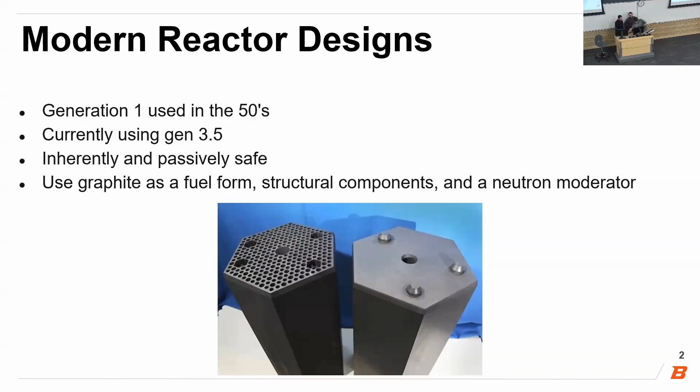Let's talk about more of this passively safe and inherently safe stuff. In an accident scenario, we lose cooling capabilities or something like that, and we have to get a lot of heat out of the core, whether from latent reactions still happening or all the heat that was in the core when it got shut down. Megawatts of heat need to come out, and the only way for that to happen is through thermal radiation between graphite components and the pressure vessel wall. Things that can inhibit this heat dissipation relate to a property called emissivity, which can be hindered by surface contamination and surface structure changes as this accident is happening.

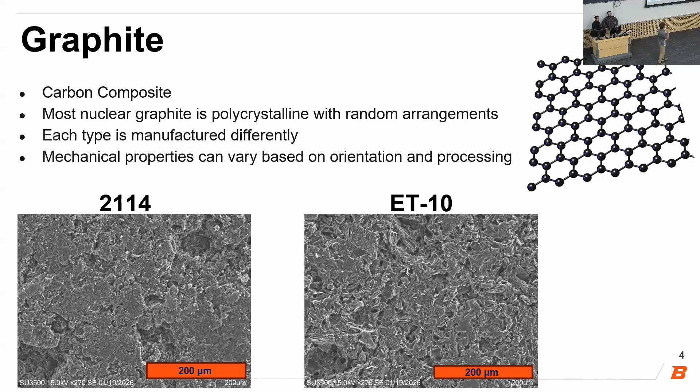Let's talk about graphite. Graphite is a carbon composite. It is polycrystalline and has a lot of different crystal arrangements. It is also very dependent on processing. Graphite suppliers don't like to tell us exactly how each grade is processed, so we just get to do research on it. A lot of the mechanical properties depend on what orientation you're looking at them, along with background processing. Seen here are two different graphite grades we looked at under an SEM image. There's a pretty big difference in the microstructure we observed, and that's just based on processing.

So what are we looking at in our research project? We're looking at emissivity. Emissivity can range from a value of 0 to 1, 0 meaning it reflects and does not absorb very much electromagnetic radiation, and 1 meaning it is a perfect absorber.

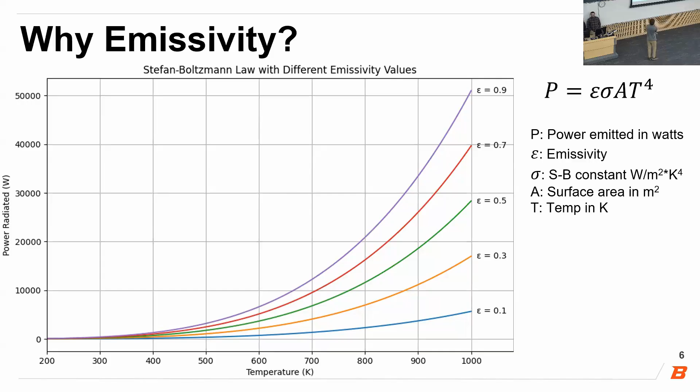Why do we care about this? Emissivity is used in the Stefan-Boltzmann law. The power that an object can emit is directly proportional to the emissivity, the Stefan-Boltzmann constant, the area that the object has, and the temperature. This chart helps you visualize the differences in emissivity at a given temperature. We can see at about 1,000 Kelvin, the difference between 0.9 emissivity and 0.7 - an object can radiate about 10,000 watts less.

So how do we measure this emissivity? We use a pyrometer, which takes infrared radiation from a surface, and using a known temperature from a thermocouple, we can use the Stefan-Boltzmann law to backtrack for emissivity.

Why are we doing this? Well, there's not very much published data on the emissivity of graphite above 500 degrees C, and modern reactor designs are having operation temperatures above 500.

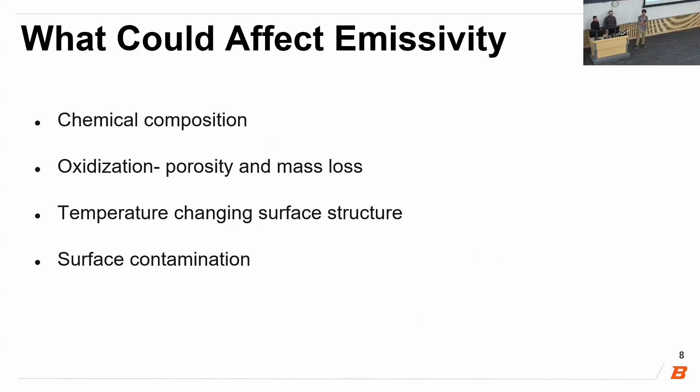So what can affect this emissivity value? The chemical composition of the surface, along with the oxidation level of the graphite causing porosity and surface changes, along with temperature and surface contamination. I'll hand it over to Dominic to explain how we did this.

So to measure the emissivity of graphite, our team developed this technical approach. It builds off previous work at Boise State and also improves the throughput and data confidence of data generated through our GEM system. So this is our basic experimental design.

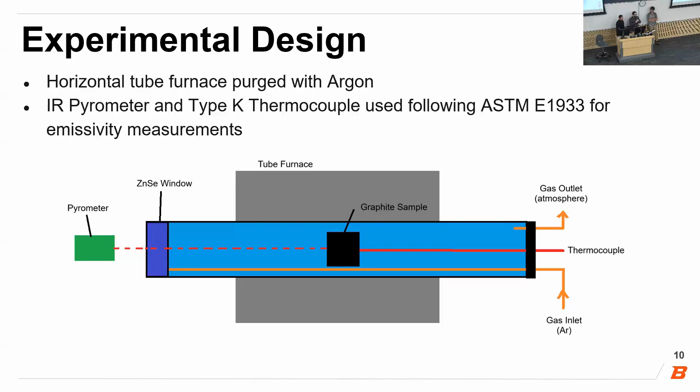On the right, you can see a flange with a gas inlet, a thermocouple, and gas outlet. In the center is where our graphite sample sits with the thermocouple inserted into it. On the left, you can see a zinc selenide window and pyrometer - zinc selenide, also a high IR transparency material. So the pyrometer and thermocouple work together to measure emissivity using ASTM E1933.

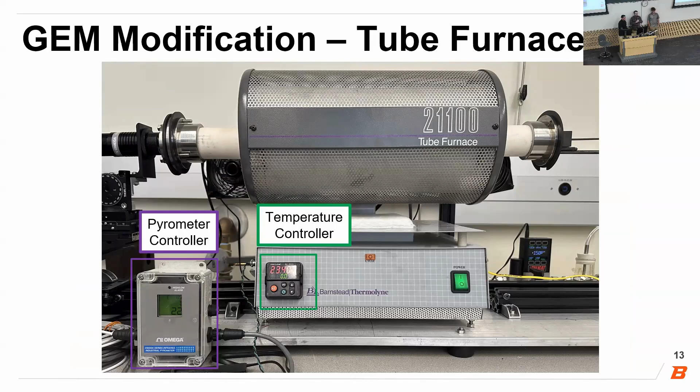We also made changes to the gas manifold and exhaust bubbler. To modify the tube furnace, we added a different temperature controller with dual TC input and RS-485 communication, as well as adding RS-232 communication to our pyrometer.

So the pyrometer is here, and you can see we added alignment stages to ensure precise and stable alignment throughout testing. You can also see an alignment laser to visually spot check where on the sample we are measuring infrared temperature.

So this is our LabVIEW software. It was added because each sample takes about 8 hours to run within the furnace, and we need 48 different runs.

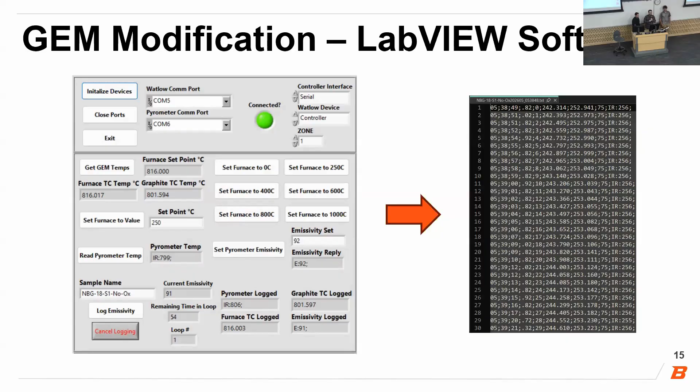So with this software, we were able to control the furnace remotely and then export that data to a text file pictured on the right.

So after modifying the furnace, we had to do a series of calibrations and qualifications. To verify the accuracy of the furnace, we did a calibration with our black body calibrator on our IR sensor, and using a reference TC, we verified our graphite TC. To verify precision, we also did a couple of tests: temperature stability of the graphite sample at each temperature set point, and repeatability testing using the same sample.

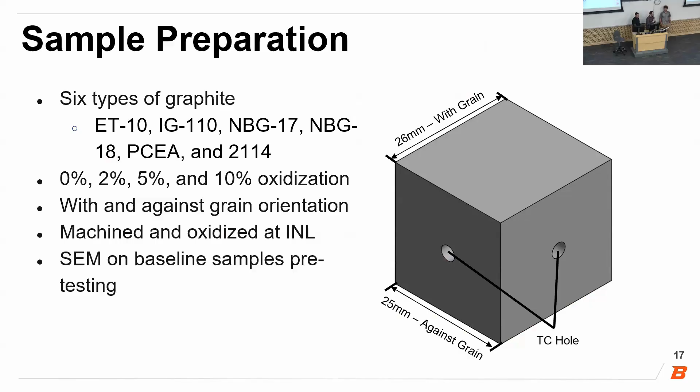We were testing 6 types of graphite, 0 to 10% oxidation, with and against grain orientation. All samples were prepared at the INL, and SEM images were taken on 0% oxidation samples. Each sample was run 250 to 1,000 degrees Celsius, with measurements following ASTM E1933. Some characterization was also done on select samples after we were done.

We tested 24 different samples with 2 different orientations, totaling 48 data sets. We've chosen ET10 against grain orientation to show.

At the start of the data collection, we ran one sample 3 times through, and we saw consistent data across all 3 runs, meaning we had very good repeatability that was within our uncertainty. All samples follow the same overall trend, with emissivity increasing steadily with temperature from 250 up to 1,000 degrees Celsius.

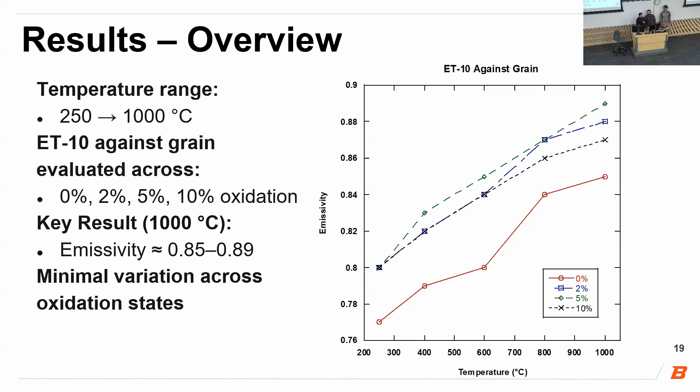This chart again shows the relationship between emissivity, temperature, and oxidation. Emissivity increases consistently with temperature for every sample. Across the full range, there is some variation between samples, but no clear pattern tying that variation to oxidation levels. At lower temperatures, most values are relatively close with one lower outlier, and as temperature increases the spread grows but follows the same overall trend. So overall, temperature seems to be driving the trend with little variance from oxidation.

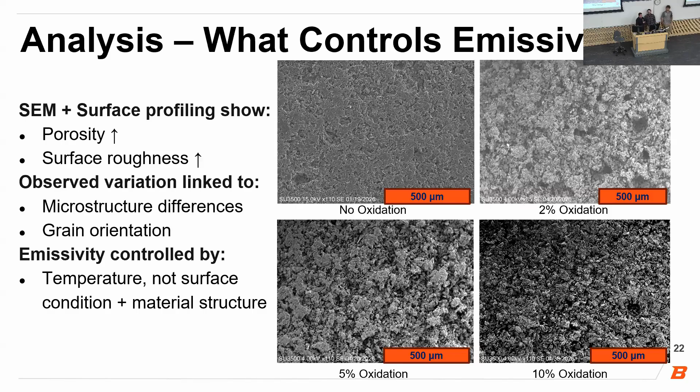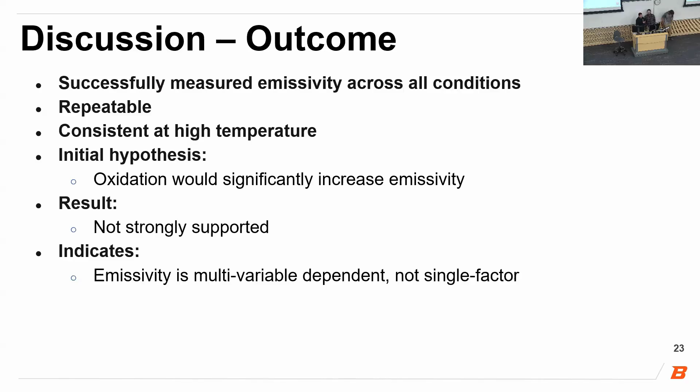Stepping back and evaluating the outcome of the project, we were able to successfully measure emissivity for several grades of graphite through all temperatures and oxidation conditions. The data set is repeatable and shows consistent behavior, especially at high temperatures. Going into the project, the expectation was that oxidation would significantly increase emissivity, but the data does not strongly support that trend. Instead, what we see is that emissivity varies, but does not show a strong or consistent correlation with oxidation. So the key takeaway here is that emissivity is not controlled by a single variable. Instead, it depends on a combination of factors, including surface temperature, surface conditions, and microstructure.

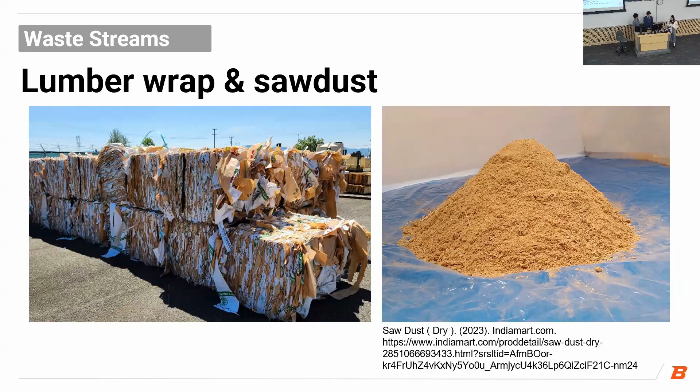Boise Cascade has continuously optimized their manufacturing processes to minimize waste. However, two irreducible low to no value waste streams remain. On the left, we can see one of the wood waste streams. This is the protective lumber wrap that is used in transport and is made of polypropylene. On the right, we have our other waste stream, sawdust, created during the manufacturing process.

The demand for wood increases annually, and in turn, the generation of wood waste also increases. Currently, 64 million metric tons of wood waste are produced annually. Additionally, approximately 28 million of this wood waste is treated, which means it contains a chemical wood preservant that contains chromium, copper, and arsenic, and poses hazards to human health and the environment. Boise Cascade, however, is already taking the important measures to ensure adequate sustainability measures when it comes to wood waste.

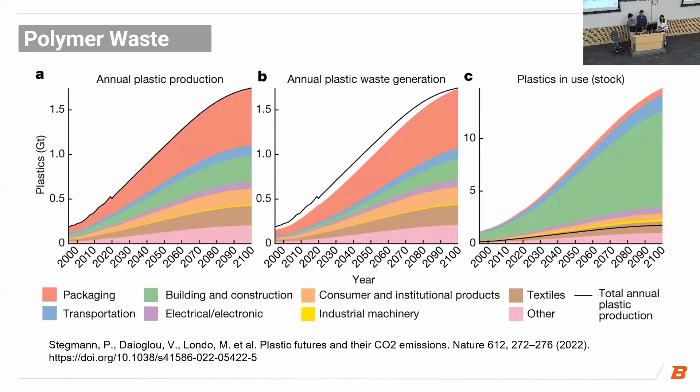This is why the upcycling framework becomes relevant. By transforming waste into a new material of higher value, Boise Cascade can turn their no to low value waste stream into a product that is competitive on the market while simultaneously increasing sustainability efforts. This ensures that the essential protective lumber wrap has an increased life cycle.

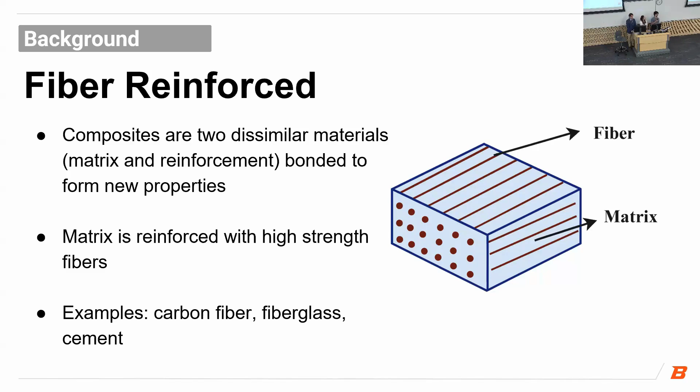Now for some background on composites. There are fiber reinforced composites, which composites in general are two dissimilar materials, the matrix and the reinforcement material, and they are bonded together in order to form new properties or to combine their properties. So the matrix is reinforced with these high strength fibers, and some common examples you see in real life are carbon fiber, fiberglass, and even cement.

And there are particle reinforced composites. These use the polymer matrix, and they're reinforced with uniformly distributed particles. Some of these particle types can include ceramics, sawdust, and glass beads. Some examples that we see in real life are ceramic composites and wood plastic composites, which is what we are tackling. So we have a polymer composite material, which has a polymer matrix and a wood particle reinforcement, which in our case is sawdust.

The industry standard actually uses HDPE or PVC, from companies like Trex or TimberTech, and we are actually using exclusively polypropylene.

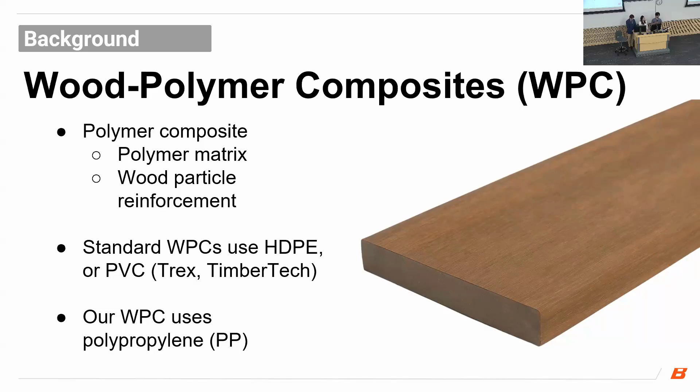So the reinforcement phase is supplied by Boise Cascade, and it's sawdust. It's supposed to boast a high stiffness and strength and improve the load bearing of the material. And it is a hydrophilic material, meaning it absorbs water easily.

As for our matrix phase, we have polypropylene. It's a ductile material, it provides the structure, and it's a hydrophobic material. It's also supplied by Boise Cascade, and this is one of their main waste streams.

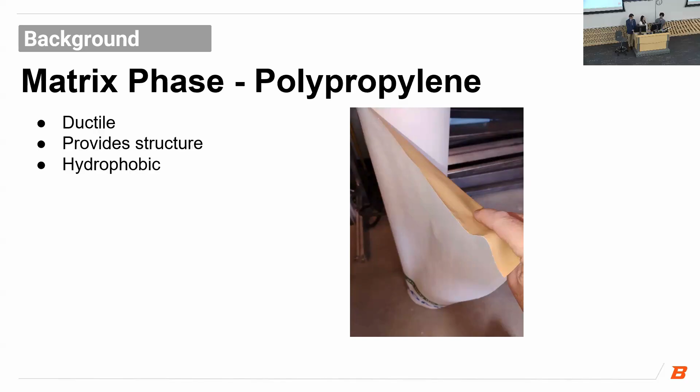So we are looking to combine their properties, but these properties do depend heavily on the composition, the interfacial bonding, as well as the quality of the processing.

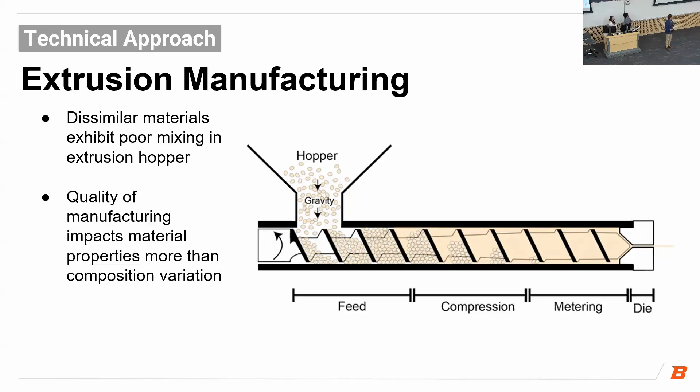Specifically, we accomplished this extrusion manufacturing by processing the 2 waste streams that Boise Cascade provided us, putting them in the hopper, which gravity fed the extrusion auger. They were then heated, compressed, and metered into a die, or in our case, 1x1 board molds.

The specific way in which we tackled this approach was by having 3 control groups and 5 variable samples. This allowed us to compare the wood plastic composites we manufactured to an industry standard, to an upcycled polymer that did not contain any reinforcement, and finally to an upcycled or a virgin polypropylene, so we could evaluate the impact that upcycling might have had.

The specific process we used is we processed both the lumber wrap and the sawdust before feeding them into an extruder. We then granulated the extrudate and potentially repeated that process as needed to ensure complete mixing. Once fully mixed, we dried the extrudate one final time before feeding it into a final extrusion, where the 1x1 boards were then sectioned and planed according to ASTM standards for a 4-point bend test.

All right, here are the results that were yielded from our testing. So here we have all our control groups, which is the Trex, the pristine, and the upcycled polypropylene, as well as our variable groups, which is the 5 through 40% wood weights.

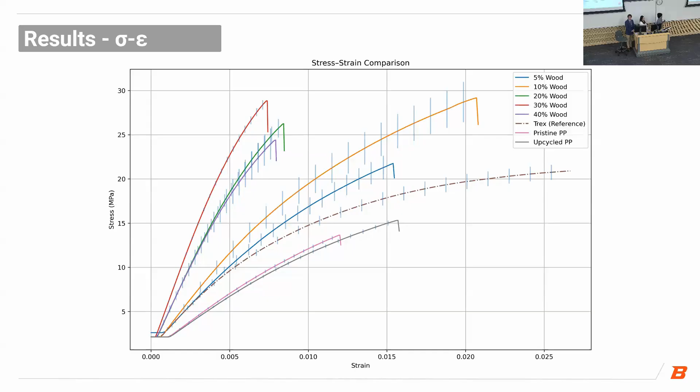Here we see there's a trend that occurs as we increase the wood content. There seems to be a stiffer curve, which must mean a higher modulus of elasticity, which is recorded over here.

But here we see that Trex exhibits about 1600 megapascals. Pristine and upcycled polypropylene have around the same modulus of elasticity as well, around 1200 megapascals. And once we introduce the reinforcement material, we see a sharp increase in the modulus of elasticity.

So we go to 1800 at 5%, 2200-ish at 10%, and 3800, a massive jump from 10% to 20%. At 30%, we peak at around 4700 megapascals. Then once we hit 40%, we dip back down. So 30% was peak for us.

There's a modulus of rupture with the same trend occurring. That dip occurs after the 30% into the 40%.

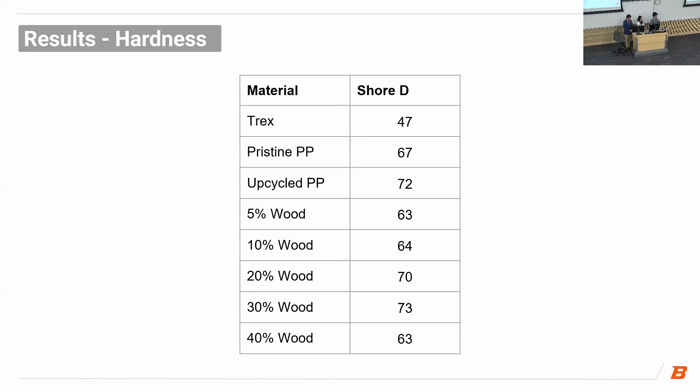And the hardness testing - not too much that's different across all of the samples we manufactured. There's a noticeable hardness difference between the industry standard Trex and our samples.

Unfortunately, it's not possible for us to discuss our results without also discussing some of the challenges we encountered. Predominantly, we found substantial voids throughout many of our samples, which impacted our results. The accuracy of the MOR and MOE is unknown, as it's not possible to quantify the exact impact these voids had on those specific numbers.

However, the hardness data was unimpacted, as the durometry testing was done on areas verified to be completely void-free. Throughout this process, we were able to improve the extrusion techniques we were utilizing and refine our processing to eliminate voids as the project progressed, but we were unable to do so completely.

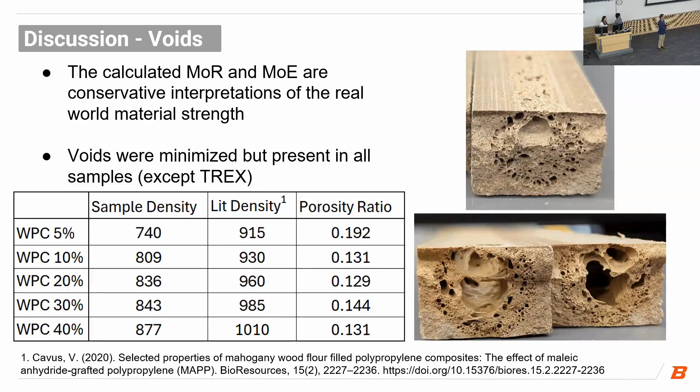This, however, doesn't impact the final conclusion of our project, which was determined using trends and comparisons between different samples rather than any individual numbers, which have that unknown error in their accuracy. And so to provide that conclusion, here is Joselyn.

We learned that despite the processing challenges we faced, trends show that a direct correlation between sawdust reinforcement, hardness, and stiffness exists. Future work should include improved manufacturing control, like an industrial drying and mixing process, and a vented extruder to try to minimize the void generation challenges.

Although future work is needed to create and optimize wood polymer composites, it can be said that for Boise Cascade, it is possible to create upcycled wood polymer composites from their two waste streams of lumber wrap and sawdust.

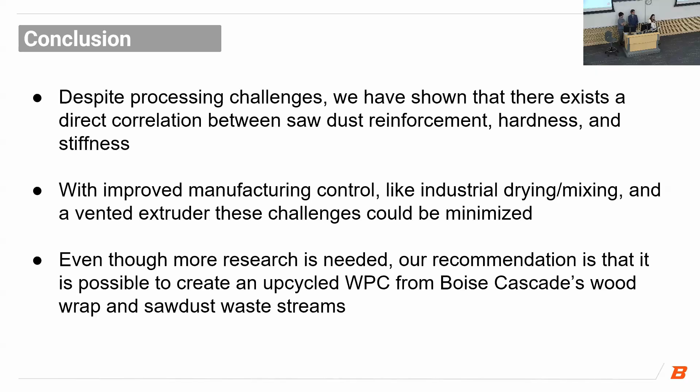Thanks, great work. How did your test results on Trex compare to published data on Trex?

The results we had on Trex compared to the published data seemed to be about approximately the same. The MOR we calculated was, I believe, within about 10% of the published value. But ultimately, the reason we wanted to repeat these experiments rather than use published data is because we wanted to compare exactly the same samples of exactly the same shape and geometry on our setup. So we feel the Trex testing we did is actually quite accurate in terms of its overall individual numbers, as that did not have any voids because we did not manufacture the Trex, obviously. So yeah, about within 10%.

So you have polypropylene, Trex as HDPE. That is correct, or PVC. It's HDPE. And virgin HDPE or PVC compared to virgin polypropylene.

Is that what you expect? Not quite. So we did the pristine, or virgin, polypropylene compared to upcycled polypropylene, because ultimately the goal here was to evaluate if Boise Cascade could make a viable composite material using the waste streams they had. And they have polypropylene, they don't really have HDPE. So even though a lot of the industry players currently use HDPE, we're really trying to investigate if we could use a different polymer and achieve similar results. We were mainly focused on the behavior of polypropylene to evaluate it as a candidate, rather than to evaluate if it was the best option for whatever use case scenario it may be used in.

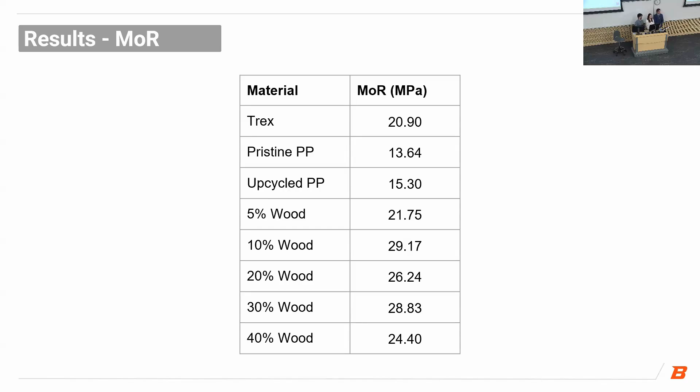Hello everybody, my name is David. These are my partners, Jacob and Joe. Our project is on charge trapping films and interfaces in 3D NAND devices.

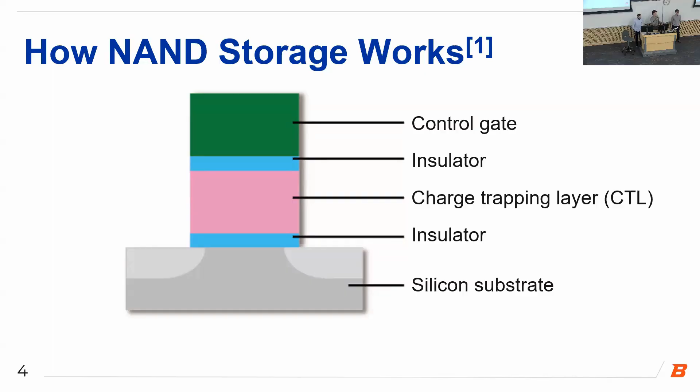To give you a quick idea of how NAND works: by applying a high voltage to the control gate, electrons can tunnel through the insulative layer into the charge trapping layer. When that voltage is removed, the charges are retained in that layer. By applying a low voltage to the control gate, electrons may or may not tunnel based on the threshold voltage, which is affected by the trapped charges. To remove the charges, you can apply a high voltage to the substrate to essentially pull them back out.

As these charge trapping layers get thinner, the operating voltage and power required decrease, which is a good thing, but the amount of available trap sites also decreases, making it harder to retain information for a long time. Any manufacturing step that alters the silicon nitride bond density and stoichiometry shifts both the trap depth and the spatial distribution of these charges. Because these processes are sequential, it's hard to know which process affects the films with what damage.

To quickly talk about the physics behind charge trapping: silicon dangling bonds are the primary source for both oxide and nitride films. In silicon dioxide interfaces, the traps are amphoteric and shallow, meaning only a little voltage is required to get charges in and out, making them not very reliable for trapping charges. In the nitride, the traps are in the bulk material—they're deep and spatially distributed throughout the film, requiring a lot more energy to get charge in and out. Any process that breaks these bonds changes how long and reliably charge is stored.

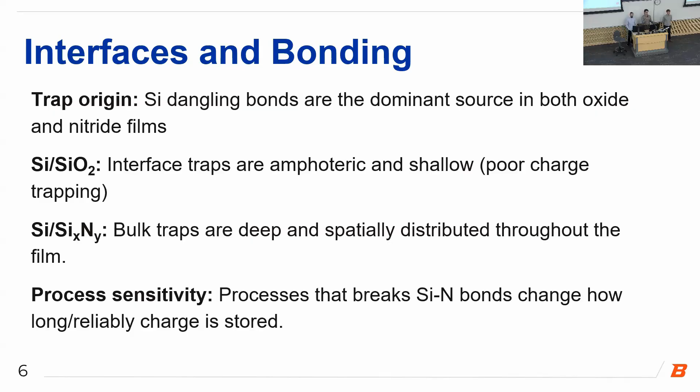We used several instruments to characterize our initial films. First, ellipsometry, which measures thickness based on phase and amplitude shifts of polarized reflected light. This can be fit to a model, giving angstrom level precision, and is also non-destructive. We used non-contact tapping mode AFM for surface topology, and KPFM to map surface potential, contact potential difference, and modified work function—this tells us if there's charge trapped in the film or not. Finally, we used XPS to distinguish the silicon 2p peak, indicating elemental silicon, silicon nitride, and silicon oxide bonding states, to track interfacial chemistry changes.

To treat our samples, we used two methods. We used electron irradiation with an SEM—this e-beam generates electron hole pairs, releasing hydrogen from silicon-hydrogen bonds and creating more silicon dangling bonds. We also used argon bombardment via an XPS instrument, where argon collisions preferentially sputter nitrogen, yielding a silicon-rich surface and inducing heavier physical damage. The goal of this project was to determine the effects of sample modification on charge trapping characteristics of both the silicon oxide and silicon nitride films.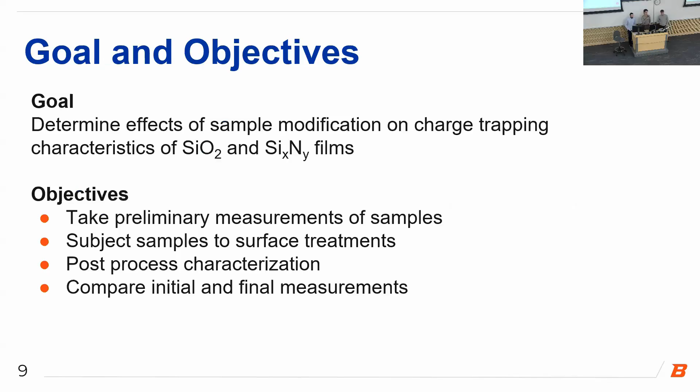To do this, we took preliminary measurements of our samples, subjected them to surface treatments, took post-process measurements, and then compared the initial and final measurements. I'll now hand it off to Jacob to tell you how we approached this problem.

As David mentioned, we had three phases of our project. Phase one was ellipsometry, AFM, KPFM, and XPS to determine our initial measurements. Phase two was our surface treatments of electron irradiation and argon bombardment. Finally, we did our metrology again to get our final results, and then we evaluated them.

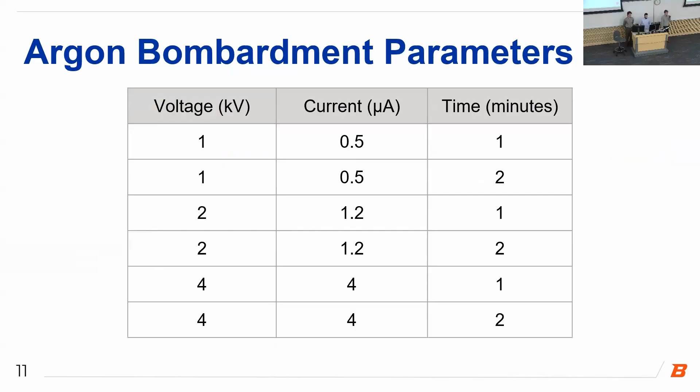These were our parameters for argon bombardment: we had three accelerating voltages and two time levels, which we determined through TRIM simulations. The long axis is 100 nanometers, and we used these simulations to qualitatively assess how deep damage would occur in our samples.

The initial thicknesses of the films we got were 120 nanometers—20 nanometers for the nitride and 100 nanometers for the oxide. We wanted to assess damage mainly on our films and not on our substrates, so we chose accelerating voltages that did not damage beyond, on average, 50 nanometers to do just that.

Our electron beam parameters were based on dosages that could be encountered by samples through an SEM scan in industry, ranging from 14 coulombs per centimeter squared to 64 coulombs per centimeter squared. It's important to note that the SEM we were working with did not have a Faraday cup, so we used the emission current of the SEM to estimate these dosages.

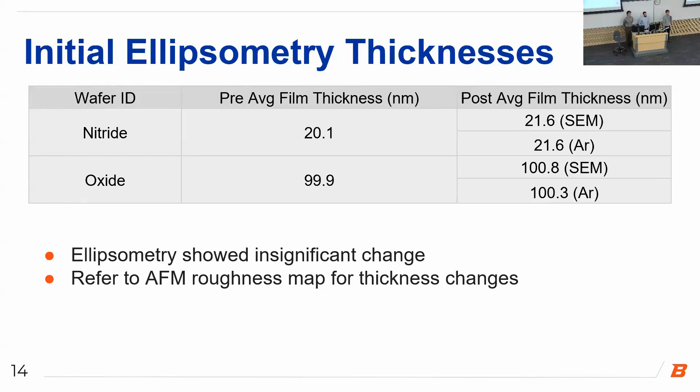As I stated previously, our pre-processing thicknesses were 20 nanometers for our nitride films and 100 nanometers for our oxides. Post-processing, these seem to have increased. We attribute this to a difference in n and k throughout the samples due to various native oxides and other contaminations on our films.

With regards to electrical characterization, there is a significant difference between pre and post processing for our nitride samples with electron bombardment, but there is not a significant difference for our oxide. The same can be said for our argon bombardment, with a more pronounced difference for our nitride samples. This is in agreement with literature we found about nitride being more sensitive to these processes than oxides. I'll now hand it off to Joe to continue analysis of our results.

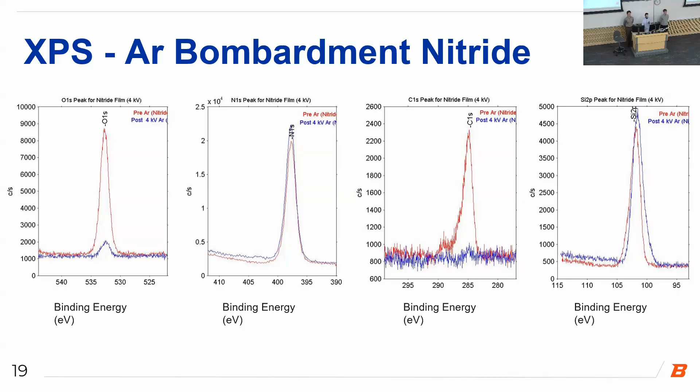Okay, so now let's take a look at the XPS result for the nitride after argon bombardment at 4 kilovolts. Red is before treatment, blue is after treatment. As we see, the oxygen peak dropped significantly after bombardment, meaning the native oxide sitting on top of the nitride was removed. The nitrogen peak stayed, confirming the nitride film is still there, and the silicon peak increased slightly. Together, these changes tell us that argon exposed the true nitride surface underneath.

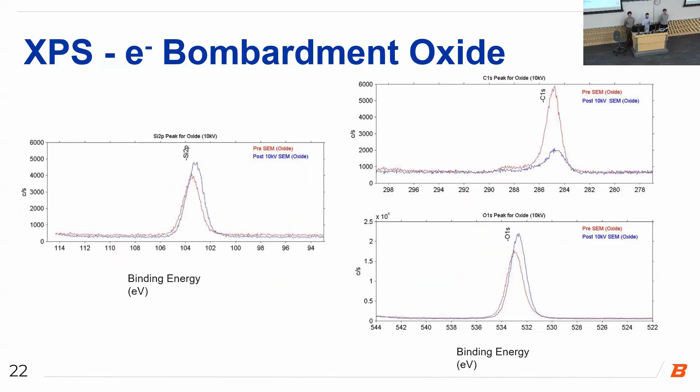To connect everything together, for argon bombardment, XPS and KPFM are telling us the same story: the nitride surface chemistry changed and its electrical behavior changed too, while the oxide showed much less change in both. For electron bombardment, XPS showed no significant chemical change in either film, but KPFM detected an electrical response in the nitride.

A few things are worth discussing. First, silicon nitride was more responsive than silicon oxide across both treatments, and the two treatments affected the films through different mechanisms. Argon changed both chemistry and electrical behavior, while electron bombardment only showed an electrical effect.

Second, one challenge we faced was that our samples are insulating, which caused charge to build up on the surface during XPS measurements, and this introduced artifacts into some of our results and made them harder to interpret.

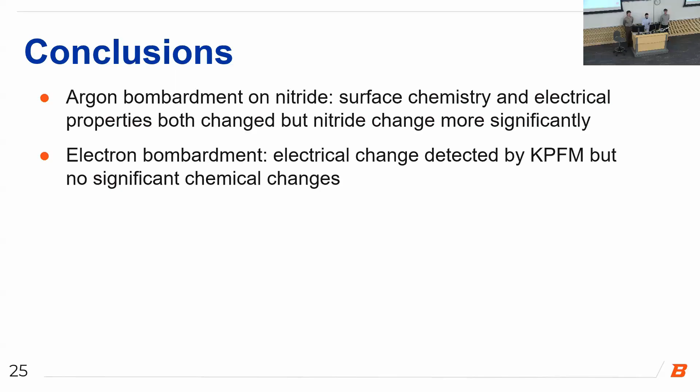To conclude, this project showed that manufacturing-related surface treatments do change the charge trapping behavior of the films used in 3D NAND memory. Silicon nitride and silicon oxide did not respond the same way, and argon and electron bombardment did not affect them the same way either.

For future work, there are three things we would consider doing differently. First, we would use doped wafers with a MOS structure, where MOS stands for metal oxide semiconductor, which would allow us to do CV measurements and directly measure trap density.

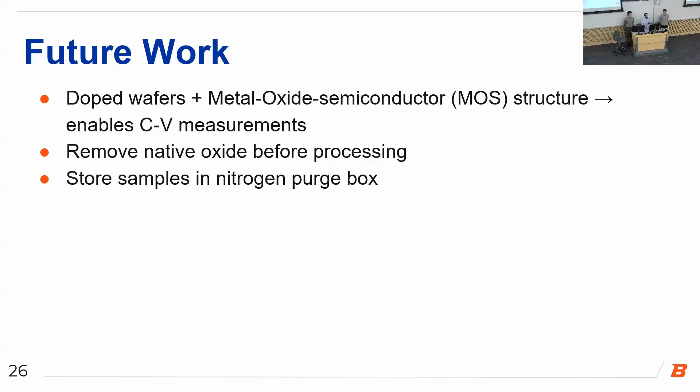Second, we would remove the native oxide from the samples before processing, so we start with a cleaner and more controlled surface. Finally, we would store the samples in a nitrogen purge box between steps to prevent them from reacting with air and affecting our results.

Thank you. Good afternoon. My name is Brylee Rubio. This is Lucy Brown and Ryan Grove. Our project focuses on corrosion assessment and mitigation of additively manufactured and wrought stainless steel.

This project is supported by NEEC, the Naval Engineering Education Consortium, which partners with universities to address engineering challenges in naval environments like corrosion in marine systems. This project is also advised by Dr. Mike Hurley and was in collaboration with a graduate researcher, Noah Montrose.

Corrosion is a major issue in naval environments where materials degrade more quickly. 316L stainless steel is commonly used for its good corrosion resistance, and additively manufactured or 3D printed stainless steel can be used to make more complex geometries. However, welding is required to join the two in application, and when you combine these conditions, it can cause issues at the interface.

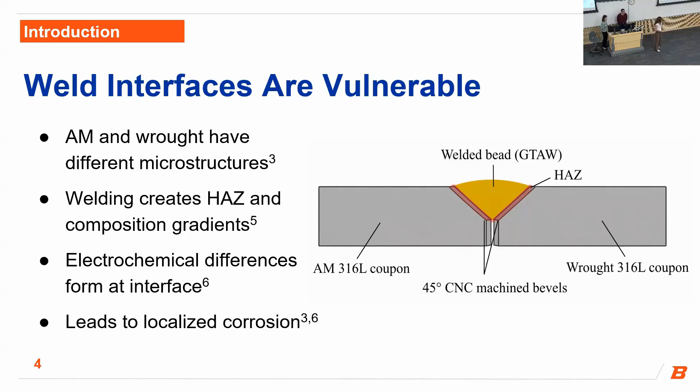So with this problem, first we looked at why stainless steel can typically resist corrosion. 316L stainless steel forms a protective chromium oxide passive film, and it's able to self-heal in the presence of oxygen. This film is stable in many environments, but in chloride environments it can tend to break down, and this breakdown becomes more likely when there's differences within the microstructure.

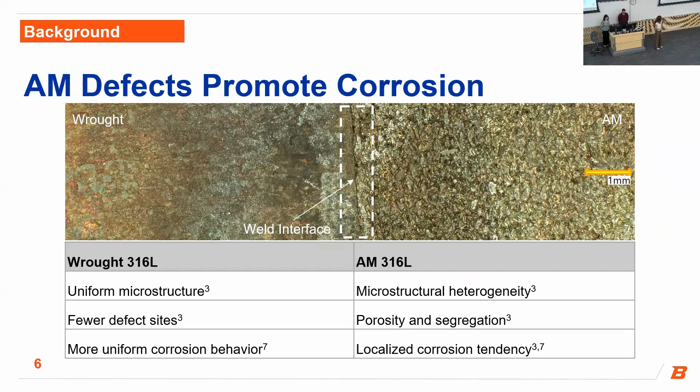Here we have one of our welded samples. On the left we have our wrought, on the right we have the additively manufactured, and highlighted in the dotted box in the middle is the weld interface. The wrought material has a much more uniform microstructure, while the additively manufactured material has more defects like porosity and segregation. These defects can act as initiation sites for localized corrosion.

It can also lead to chromium depletion at the grain boundaries, which can weaken that passive film and it can lose its ability to self-heal.

So in order to address this, we are looking at a mitigation strategy. Specifically, we are looking at atomic layer deposition, or ALD. ALD can form thin conformal coatings that can coat even complex surfaces with rough features and pits.

So in order to analyze this, we use electrochemical testing. Specifically, we use EIS, or electrochemical impedance spectroscopy. It applies a small AC signal and measures the response. If you look at the low frequency impedance, you can determine how the material will resist corrosion, where higher impedance is more corrosion resistant and lower impedance is more likely to corrode.

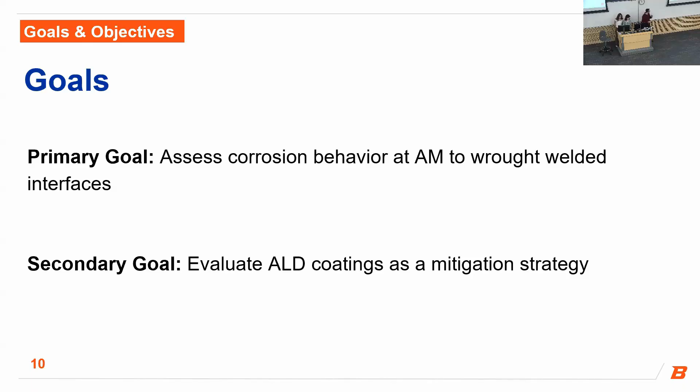The nickel ribbon was needed to make an electrical connection. Then the samples were mounted in epoxy to prevent galvanic corrosion between the nickel ribbon and the stainless steel.

TIG welding with ER309 stainless steel as the filler metal was how they were welded. Each group consisted of samples being in the as-received or polished condition. Polished samples were polished between 60 to 800 grit to create a smoother surface.

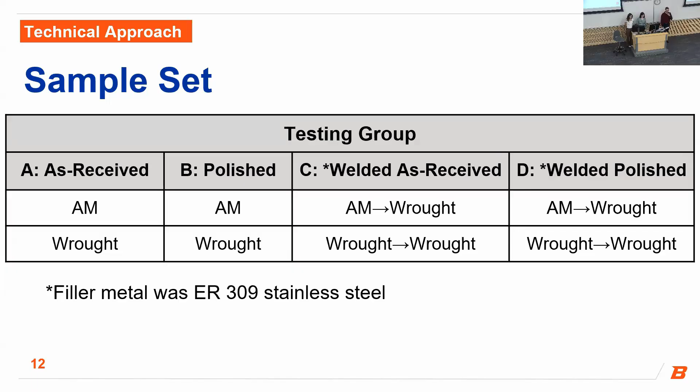Two of the 3D-to-wrought samples, one as received and the other polished, had a 100 nanometer thick aluminum oxide coating deposited on them by ALD.

The samples were submerged in solution for about an hour before the first EIS test to allow the corrosion potential of the samples to stabilize. The samples sat in solution for a total of 500 hours, which is equivalent to 21 days.

EIS was run four times over the course of 21 days, at days 1, 7, 14, and 21. This was to monitor the corrosion behavior over the course of exposure.

EIS was used to characterize corrosion because it is non-destructive, evaluates coating degradation, and helps to understand the mechanisms behind passivation. Some of the parameters used for EIS include frequency range and voltage amplitude.

A frequency range of 100 kilohertz to 10 millihertz was used to capture the full electrochemical spectrum, ranging from high frequency ohmic resistance to low frequency charge transfer reactions necessary to calculate corrosion rates.

We applied a 10 millivolt amplitude to ensure a linear response from the system while providing a high enough signal to noise ratio for accurate data collection.

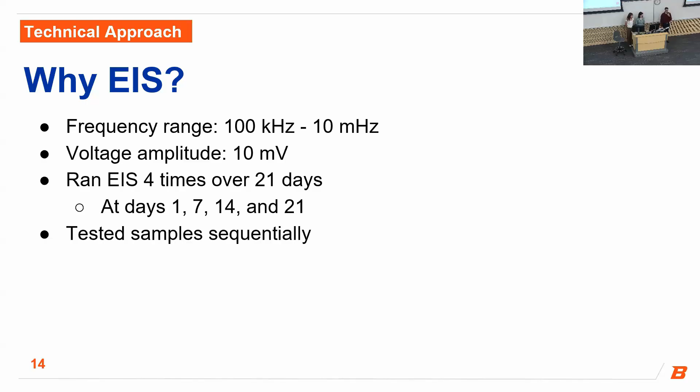Due to the setup being limited to testing one sample at a time, the samples were tested sequentially.

EIS helped us collect quantitative data, but to get a visual representation of our corrosion, each sample was macro and micro imaged pre and post immersion testing.

The macro images were taken with a phone and a light box, while the micro images were taken with the Keyence optical microscope in the IMO. Imaging was used to locate where the corrosion occurred. Now that you know how we conducted our research, Lucy will present what we found.

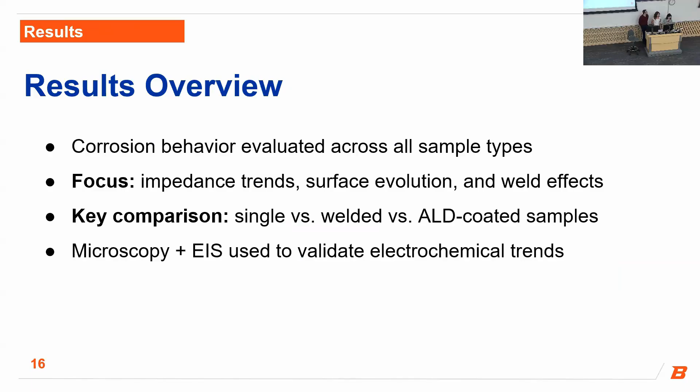Beginning with our baseline single samples, we took the impedance magnitude values at a frequency of 0.01 hertz and plotted it versus time to evaluate how the surface evolves during exposure. These impedance values were taken from the Bode plots of all of our samples after their 4 EIS measurements. We use 0.01 hertz because at a low frequency, the AC signal reflects the overall resistance to charge transfer across the surface of each sample.

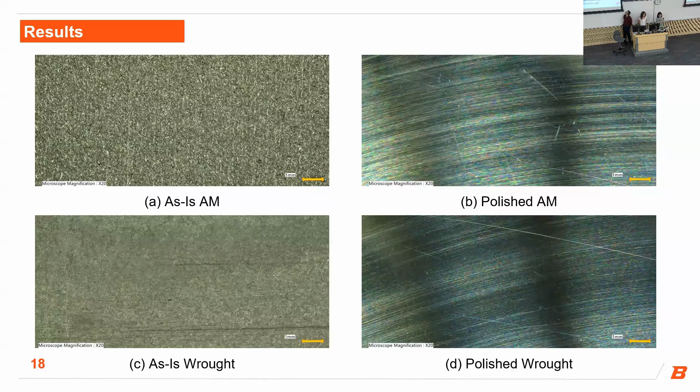Here are some images taken of our single samples on the Keyence microscope after 21 days in the sodium chloride solution. As you can see, there is no visible corrosion, and this does reflect what we saw in our EIS data. For the welded samples, we observed significantly lower impedance than our single samples.

This demonstrates that they are more susceptible to corrosion. There is still a slight increase in impedance over time, which means that the passive film is forming, but it's not stabilizing as effectively as our single samples. And again, the polished samples consistently had higher impedance than the as-is.

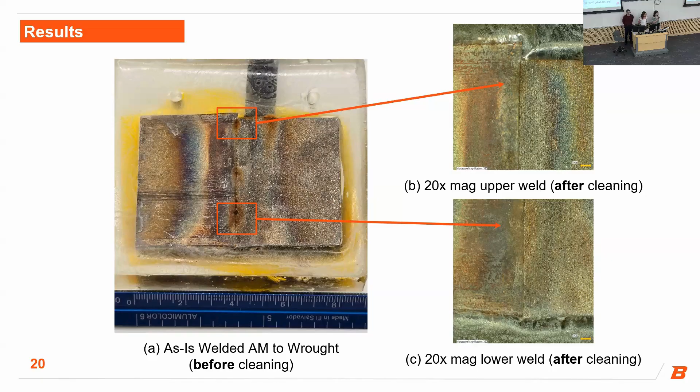Here are some images of our 3D welded to wrought as-is sample after 21 days of immersion. The image on the left shows corrosion products along the weld that confirm the electrochemical activity we suspected from our EIS data. The images on the right show what the metal looks like after cleaning. There is some faint discoloration that was not there before.

This is our 3D welded to wrought polished sample. And again, there's corrosion products along the weld, but there are markings that are more visible after cleaning.

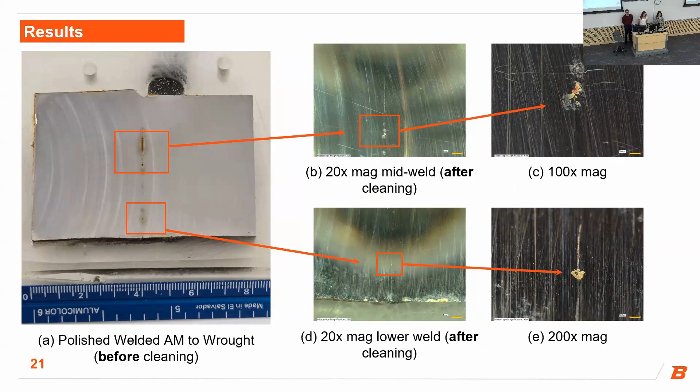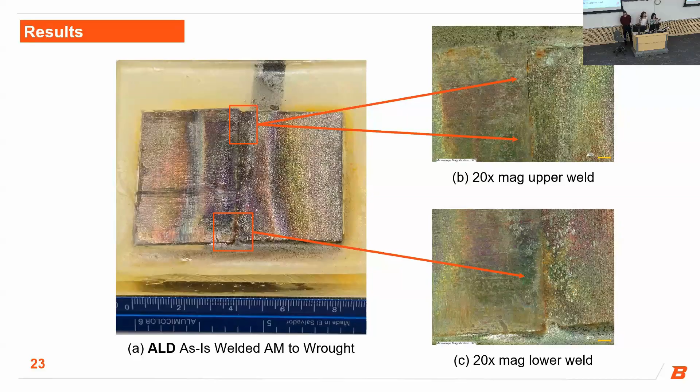Here are some images of our ALD as-is sample. The images on the right have very apparent corrosion in various locations along the weld. It's that classic rusty color. And we also see apparent damage in our ALD polish sample.

It's more faint, but it's along the weld at the very top of the sample. It kind of looks like a thin white line. These physical results correspond with the limited EIS data we were observing. This decrease in resistance we think is likely due to a non-uniform ALD coating at the weld because of the weld having heat-affected zones, internal stresses, and compositional gradients.

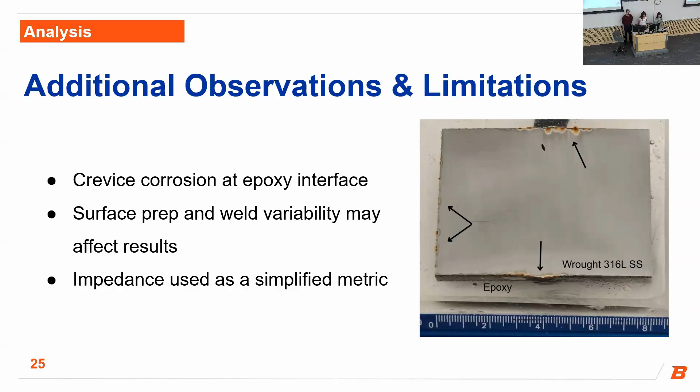There are a few observations and limitations worth noting. We observe crevice corrosion at the epoxy interface of many of our samples, as you can see in this picture, and this may have influenced the measured impedance responses. Variations in surface preparation and weld variability could likely contribute to differences in the passive film forming between samples, and it's important to note that impedance is a simplified metric and does not capture all aspects of corrosion mechanisms.

Overall, our results demonstrate that the weld interface is the dominant factor in controlling corrosion behavior in additively manufactured to wrought stainless steel systems. Our welded samples consistently exhibited lower impedance compared to our single samples, and while surface finishing improved corrosion resistance, it did not eliminate the influence of the weld.

Our ALD-coated samples showed an early decrease in impedance and visible corrosion. However, due to limited time, we cannot make any definitive conclusions about long-term mitigation. But overall, these findings confirm that the weld interface is the most susceptible region to degradation and governs corrosion behavior.

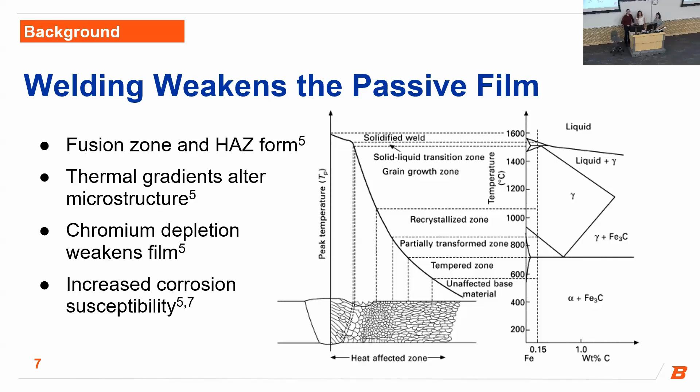Did you make them? Oh, from Brandon Corp. Laser powder bed fusion done by Brandon. Thank you.

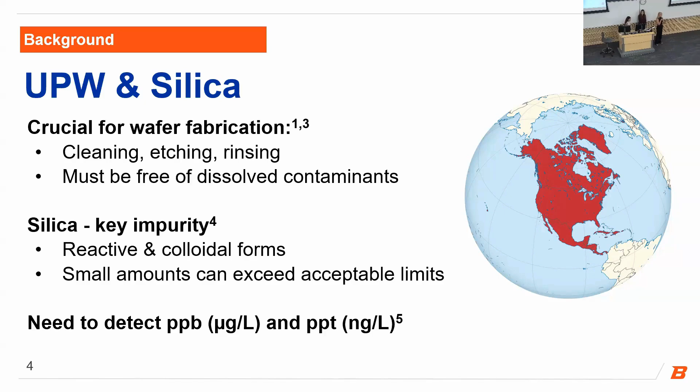Other methods do exist for detecting silica. However, we decided to go with the colorimetric method because it is simpler, less costly, and more accessible here to us on campus. To measure silica concentration, we used UV visible spectroscopy because it measures the intensity of a colored solution.

It is important to note that the detector only measures light intensity, and it is agnostic to scattering and refraction, which can influence our measurement readings. This becomes especially important later when we discuss sources of measurement variability in our results section.

A well-documented colorimetric method is the ASTM D859 standard, which can determine reactive silica concentrations within a range of 20 to 1,000 parts per billion.

It involves a series of chemical reactions that eventually produce a measurable blue-colored complex. The first step is acidification, which converts all colloidal forms of silica into its reactive form.

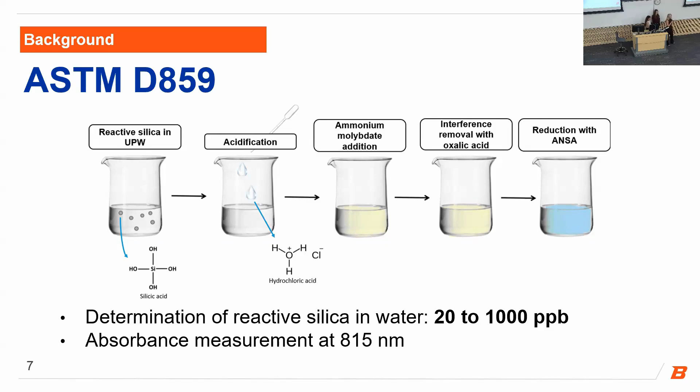For our experimental design, we kept this entire procedure constant, but compared two different reducing agents to determine which one gave us the most reliable results. And now I'm going to pass it over to Suemy to tell you about our goals and objectives.

Okay, now moving on to goals and objectives. The goal of this project was to evaluate two colorimetric methods for silica detection and identify which one will give us the lowest detection limit.

For our objectives, the first one is to conduct a literature review on existing colorimetric methods, many of which are decades old, highlighting the need to reassess these methods using modern equipment. The second objective is to test the ASTM-based method using two different reducing agents, ANSA and ascorbic acid.

Ascorbic acid is a reducing agent that is used in another colorimetric method called EPA MERL 370.1. Finally, we wanted to compare both methods via error and statistical analysis.

The method of standard addition, or MSA, is a quantitative technique where we determine the concentration of an unknown analyte in a sample. In this method, constant volumes of unknown are placed into different samples, and then increased volumes of the standard solution are added, and finally we dilute them to a fixed final volume.

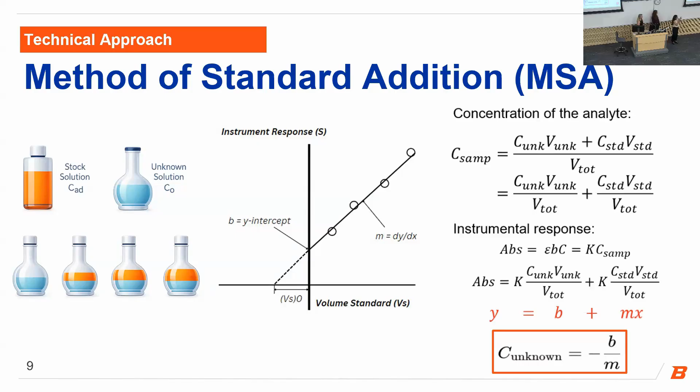The instrument response for each sample is measured, and the instrument response is plotted against the volume of standard added, giving us a linear relationship described by y equals mx plus b. To get the concentration of the unknown, we look at the x-intercept, which equals negative y-intercept divided by the slope.

So for MSA implementation in our experiments, we prepare a series of dilutions using ultra-pure water from the MilliQ system and sodium metasilicate. We prepare 4 different standards of different concentrations, and one of them we treat as the unknown.

We intentionally prepare the unknown at a known concentration level because we wanted to see if our results match. That will give us a confirmation that our method and measurements were working correctly.

And for sample preparation, we did some modifications to the standard MSA. We varied the concentration of the standards, but we kept the volume of them constant.

This will give us a plot that relates the instrument response with the concentration, and that will be a much easier way to calculate the concentration of the unknown.

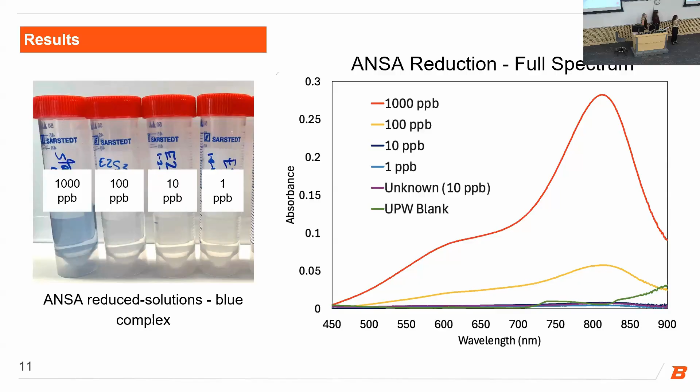So for our results, our first set of samples used ANSA as a reducing agent, and as we can see in the image here, it turned blue. When we look at the full spectrum, we see absorbance peaks for two of our highest concentrations at 815 nanometers. However, below that, we could not see any absorbance peaks, which means that our limit of detection could be between 10 and 100 ppb.

On the other hand, with our second set of samples, we used ascorbic acid as our reducing agent, and instead of turning blue, it turned yellow. We think that this happened because there was incomplete reduction.

This suggests that we cannot reliably detect silica at the concentration of 10 parts per billion. We didn't have enough time to collect enough data to have a large enough sample size to do statistical analysis, so we decided to do some error analysis instead.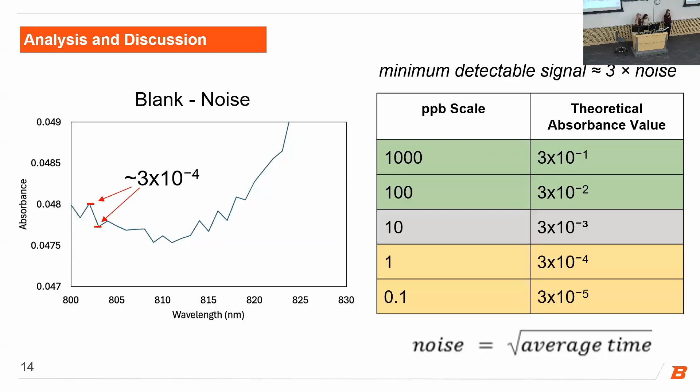Then we used the instrument response from our highest concentration sample, and generated a table of theoretical values of instrument responses for lower concentrations. We compared this to the random noise to determine the lowest concentration we should theoretically be able to detect with this noise level. A good signal is at least 3 times the noise. We determined that we should theoretically be able to detect 10 parts per billion with this level of noise because our theoretical signal is still 10 times our noise level.

So then we looked further into sources of error, and we realized that we have a significant variation in our baseline measurements that we weren't expecting to see. The baseline variation was about 1.6 times 10 to the negative 3, and this is over 50% of the signal that we should have been getting for the 10 part per billion sample. So this would, in theory, impact our ability to detect that low of a concentration.

While we're not sure the exact cause of this baseline variation yet, we think that it could be due to scattering, because the instrument is agnostic as to whether the reduction in intensity of the light is due to absorbance, scattering, or refraction. Different things may be able to cause different scattering in the sample, such as different speciation during the silica molybdate blue complex development.

In conclusion, we're able to detect silica using the ASTM-based method with an ANSA reducing agent down to 100 parts per billion. Our method detection limit is likely somewhere between 10 and 100 parts per billion, which is comparable to the ASTM's documented method detection limit of 20 parts per billion. While instrument precision was pretty high, our baseline error significantly reduced accuracy and therefore impacted our method detection limit.

In the future, we could try taking more measurements between 10 and 1,000 parts per billion at different concentrations, so we have more data to produce a trend line with on our plot. We could also take at least 3 measurements of each concentration so we could perform statistical analysis. We could also look into the cause of the baseline error and attempt to reduce or eliminate it. We could also investigate why our ascorbic acid did not work the way we expected it to.

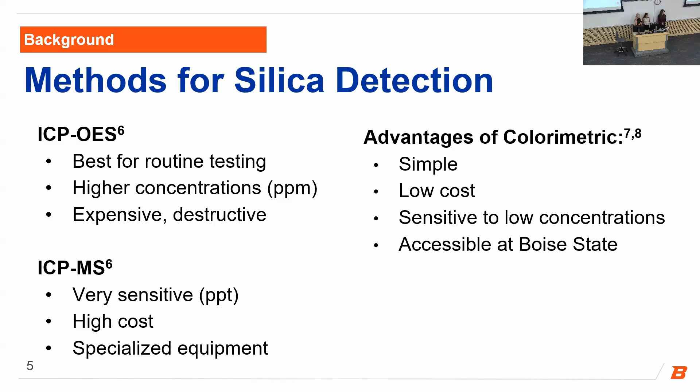My name is Scott Horton. I'm here with my classmates Jacob Olson and Blake Michelson. Our project is on determining the hygroscopicity of salts. Our sponsor was also Idaho National Laboratories. Our contact there is Kevin Tolman, and our BSU advisor is Brian Jaques.

INL was interested in this project because the rates of hygroscopicity for salts are not well known, and they also wanted to make sure that purity requirements and specifications were met for their testing.

Some problems that we encountered throughout this project were that testing methods were very inconsistent, and also that salts will take on moisture when they're left out in the open.

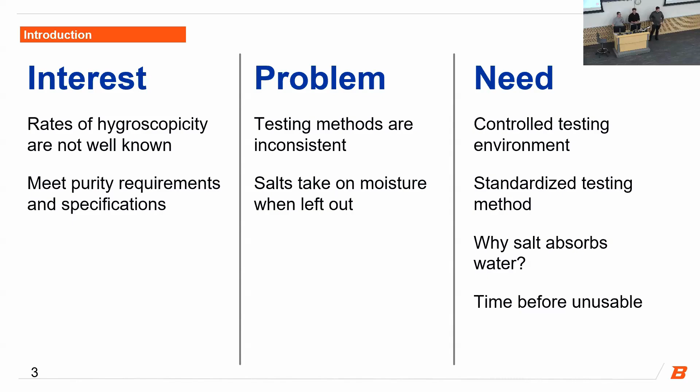So some needs for our project: we needed a controlled testing environment, a standardized testing method. We wanted to understand why salts absorb water and how long a salt could be left out before it's unusable for any type of testing.

So our goal is to determine the hygroscopicity of salts. In order to do so, first we needed to calculate the surface area and then determine the weight gain over time for our chosen salts, which were lithium chloride, a eutectic lithium chloride, potassium chloride, sodium chloride, and cesium chloride. Finally, provide a chart of the salt hygroscopicities to our sponsor and advisor.

So what is hygroscopicity? It's a material's tendency to absorb moisture from the surrounding air. With that, it'll always have moisture uptake, which includes mass gain and hydrolysis. Because there's moisture present on the material, it can cause corrosion. But knowing the hygroscopicity can lead to safer storage and handling.

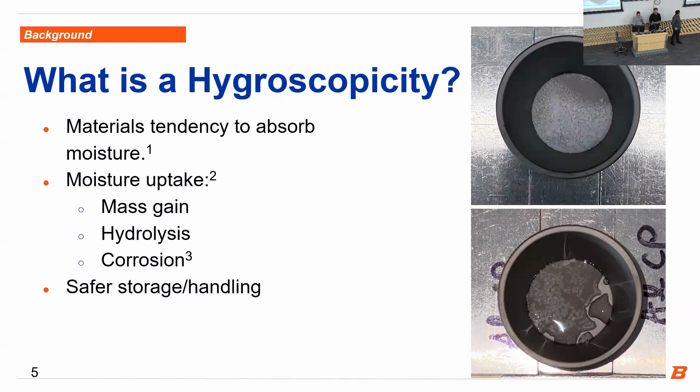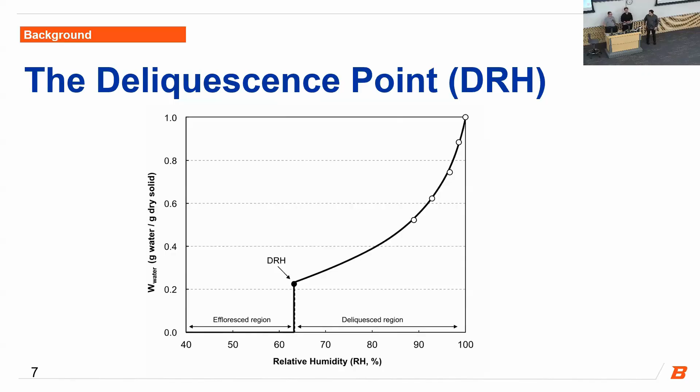This graph shows how water content of a material can change with increasing relative humidity. At lower humidity levels, the material remains in the adsorption region. But each salt has its own point where, at certain temperatures and humidities, it reaches a deliquescence relative humidity, denoted as DRH, where the salt transitions from limited surface adsorption to substantial liquid phase moisture uptake. Beyond that point, in the deliquescence or absorption region, water uptake increases significantly as humidity rises, which also indicates that the material is dissolving into water.

So in order to understand the hygroscopicity, knowing a salt's surface area is important. The Brunauer-Emmett-Teller method, or BET, is an analytical technique used to find the specific surface area of solid materials. The method is based on physical adsorption of gas molecules onto a solid surface, and it extends the Langmuir adsorption model from a single layer to multi-layer adsorption. The BET method also provides critical information about surface area, which strongly influences the adsorption capacity and material reactivity.

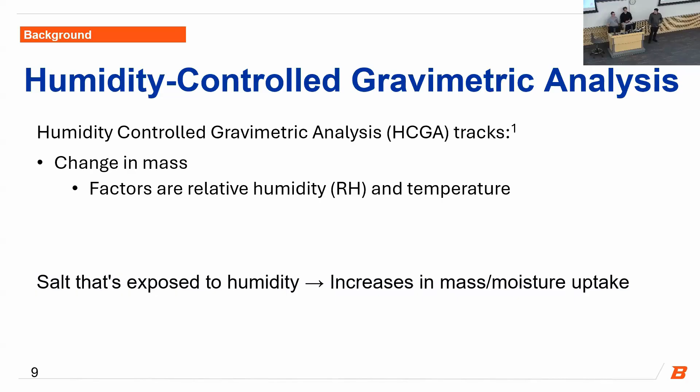Then we go into the humidity control gravimetric analysis, or HCGA, which tracks change in mass due to factors of relative humidity and temperature. So salt that's exposed to humidity increases in mass through moisture uptake. And I'll turn the time over to Jacob.

To round out the background section, we used an Arrhenius-based model to describe moisture uptake as a temperature-dependent process for our lithium chloride and eutectic salts above their deliquescence relative humidity. Once the salts are above their DRH, they transform into bulk diffusion rather than just surface adsorption. The main idea is that high temperature will increase the uptake rate, allowing accelerated testing to predict lower temperature performance. We are doing this because lithium chloride and the eutectic have lower DRHs than 20% relative humidity, which is the lowest humidity level that the chamber can go.

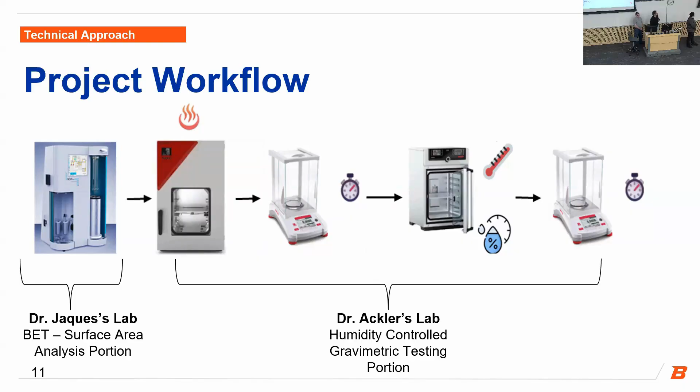Switching over to the technical approach, we first wanted to show an overview of our entire project workflow. We start this work in Dr. Jaques's lab with the BET surface area analysis portion, and then we transfer over to Dr. Ackler's lab, where we do the humidity-controlled gravimetric testing, which consists of vacuum oven drying, exposure in the humidity chamber, and weighing at allotted periods of time.

Taking a closer look at the BET procedure, the machine we used for this was the Quantachrome Nova 2200E series, and it consists of two main operational steps.

The first is the degassing step. This prepares the surface for nitrogen adsorption. You put the sample in the test cell and into the heating mantle, and then you heat it up to 300 degrees Celsius under vacuum. This is going to remove physisorbed water, gases, and any other contaminants in the system.

We then move it over to the analysis step where the sample is cooled to cryogenic conditions in the liquid nitrogen dewar. It's then exposed to gas nitrogen at controlled relative pressures, and the BET model calculates the surface area automatically from there.

Switching over to our humidity-controlled gravimetric analysis, it consists of 3 main steps. The first is to measure the crucible mass and the initial dry salt mass. The second is to dry the samples in the vacuum oven to remove that residual moisture and any impurities, and then record the mass once again.

And then the third is to expose the samples in the humidity chamber and record the mass at fixed time intervals.

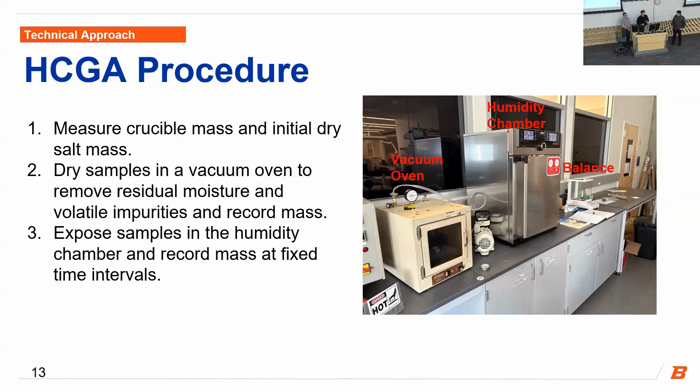Now, moving into our results data tables, this first one is the surface area analysis. As you can see from our surface area values, most of them hover between 0.13 to 0.25 meters squared per gram. These are relatively believable values in accordance with literature.

However, it's important to note that there's not one set in stone value because different salt manufacturers have different purities and salt specifications. The RSD, or relative standard deviation, is useful here because the absolute means of these samples are very small, which means that very small measurement differences appear large proportionally. The high RSD means that the measurements are very noisy, and some of the small differences in the results can be reflected in the powder packing, sample heterogeneity, and low area BET measurement sensitivity.

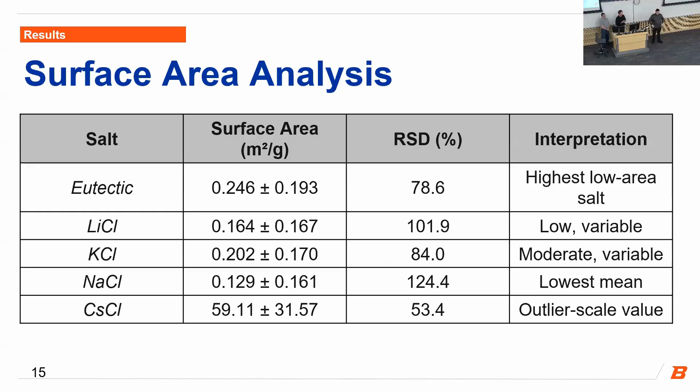Another important observation is that our cesium chloride values have a completely different magnitude and should be approached with caution. However, it's important to note that nothing in the testing procedure changed between any of the salts.

As you can see, for the lithium chloride and the eutectic, they are above their deliquescence point, which is why their water uptake is significantly larger than the other 3. And once they're above their deliquescence point, their behavior is as you would expect. With increasing temperature and humidity, they have a substantial increase in the weight gained.

For the sodium, potassium, and cesium salts that are below their deliquescence point, the measurements for this are basically negligible and can be due to surface adsorption or measurement error. Because they're below their deliquescence point, we did deliquescence point specific testing, which Blake will talk about a little bit more in our analysis section.

And finally, we have our surface area versus weight gain. This table correlates surface area with relative humidity with the dry salt mass. And there's 2 main points that we can take away from it. The first point is, as you would expect, with increasing relative humidity and increasing salt mass, there's an increase in the mean water gain.

But the second and more important part is, as you can see, the eutectic has a higher surface area, but a lower water gain. That tells us that for the surface adsorption portion of this process, the surface area is really important, but once the process transforms into bulk diffusion, the salt composition itself is the driving factor in this water uptake.

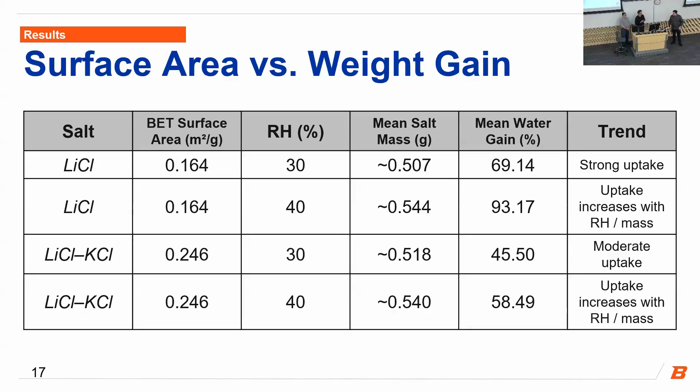Next, I'll hand it over to Blake to have a further discussion of the analysis of our results.

Moving forward with lithium chloride and our eutectic, we plotted temperature in Celsius versus weight percent gain. We have points on each graph for 30% relative humidity on the left and 40% relative humidity on the right, at 40, 50, 60, and 70 degrees Celsius. Using these points, we extrapolate that at 22 degrees Celsius for lithium chloride and our eutectic, the pink dots being lithium chloride and orange being the eutectic, we can determine their percent gain, shown on the left side of each graph.

This is great for lithium chloride and eutectic, but what about our other salts: cesium, potassium, and sodium chloride? What we need to figure out is, if they do not deliquesce at 30 and 40% relative humidity, when do they deliquesce?

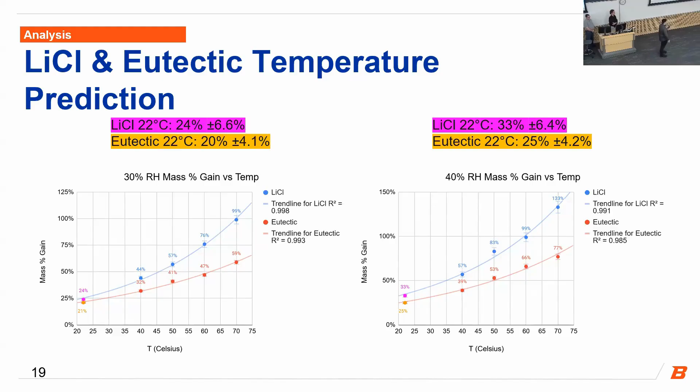An important note is that our humidity chamber is unable to go below 40 degrees Celsius. However, we do know that as temperature decreases, the deliquescence point increases. In other words, if we know that sodium chloride does not deliquesce below 75% at 40 degrees Celsius, then it absolutely won't at 22 degrees Celsius.

With this in mind, we did deliquescence testing and found that the deliquescence point is somewhere between 0 and 20% for lithium chloride and eutectic. It is between 75 and 85% for sodium chloride, somewhere above 90% for potassium chloride, and between 60 and 70% for cesium chloride.

Due to a lack of time for experimentation, we couldn't go down all the avenues we wish to. However, we hope that future work will explore routes such as determining time dependency. We can tell you how much weight gain there was at different temperatures over 40 minutes, but we don't know for 20, 10, or 5 minutes on, say, a countertop. For narrowing down the deliquescence points, we have a range, but it'd be fantastic if future work could look further into that.

Also investigating other salts. Initially we wished to look at strontium and cerium chloride in addition to our 5 salts, but unfortunately didn't have the time to do so.

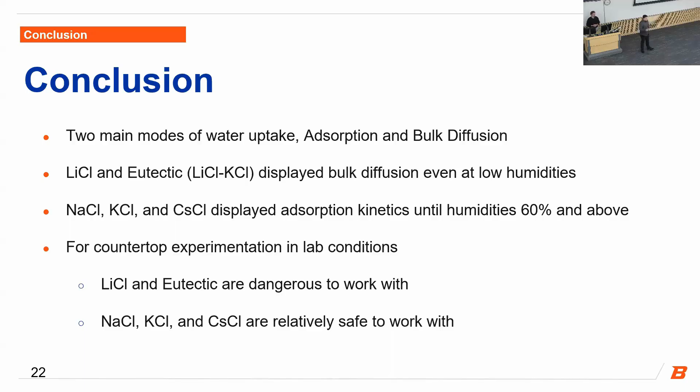In conclusion, we found there were two water uptake methods for salts: adsorption and bulk diffusion. Lithium chloride and eutectic underwent bulk diffusion at relatively low humidities, while cesium, potassium, and sodium chloride underwent adsorption up to relatively high humidities. For countertop experimentation, though this is an overgeneralization, we can consider working with lithium chloride and the eutectic as fairly dangerous, while potassium, cesium, and sodium chloride are relatively safe if you're fine with up to 0.2% weight percent gain for your salts.